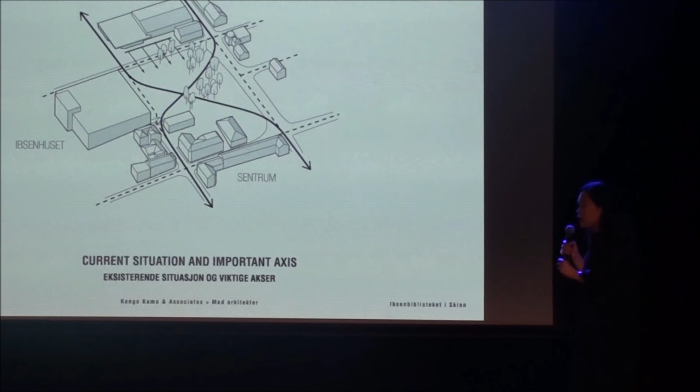So one thing we focused on is the flow of people. The current site has an amazing park, and of course the Ibsen house works very well with the park, and it's a destination at the same time. It suggests this spontaneous flow, and we decided to generate the form of architecture and planning that takes in the flow, so it becomes part of everyday life and daily activities as people use the library. So that's the current flow that we consider quite beautiful and quite interesting.

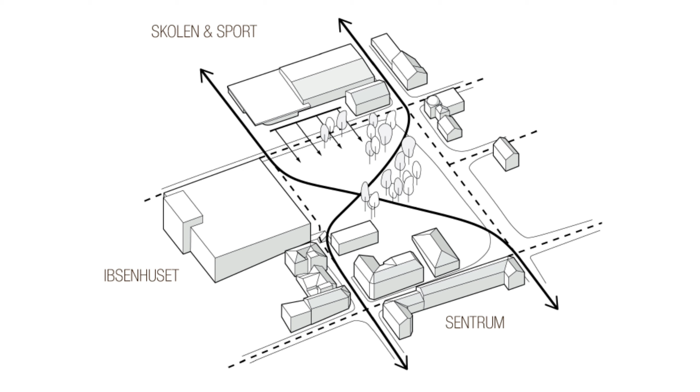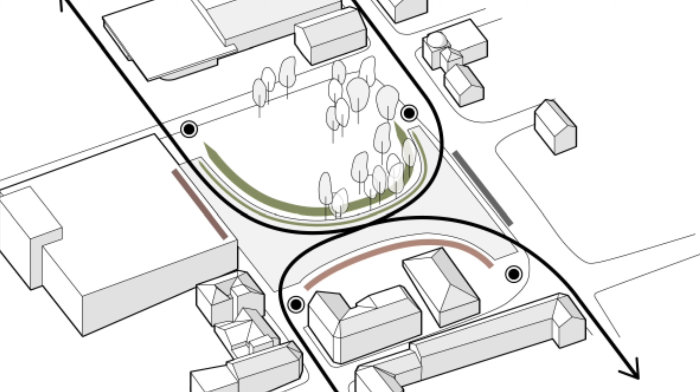But how do we accentuate this flow? By taking the flow into the library. So we tried to imagine two faces of the project. One is, of course, to fully embrace these beautiful trees in the park and the relationship to the Ibsen house. And the other is the side that faces the city, so it announces itself as the new cultural core.

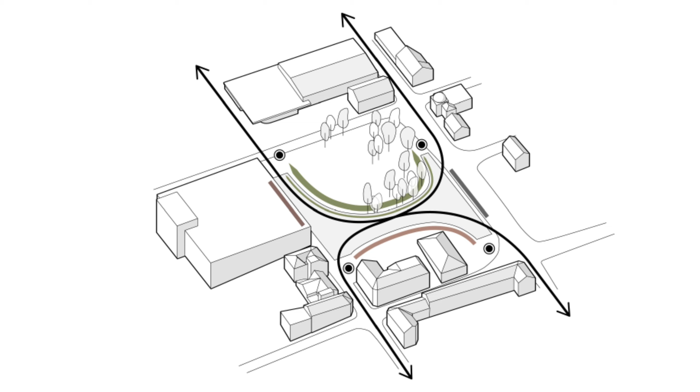Another aspect is that we need to fully integrate this house to the new library. It's a new couple that works hand in hand. These are inseparable elements: one is the library to interpret the writings, gain knowledge, and open for the public, but the house itself has that nature by showing it in the theater, the stage. It's quite natural for us that full integration and free flow in and out of the library and the house was a natural part of the planning.

So the form of the architecture is generated naturally by tracing the flow that we wanted to achieve, and the face that we wanted to show to the garden, the park, and the city side.

The second operation that we attempted is to engage the one side of the building, the architecture that is embracing the park, to be very, very low. So we have these low engagements, very human scale, very much to the scale that is inviting and works very well with the park. And second is to peel up the other side of the roof, so that it announces itself and opens itself, exposing the activity inside to the side of the city.

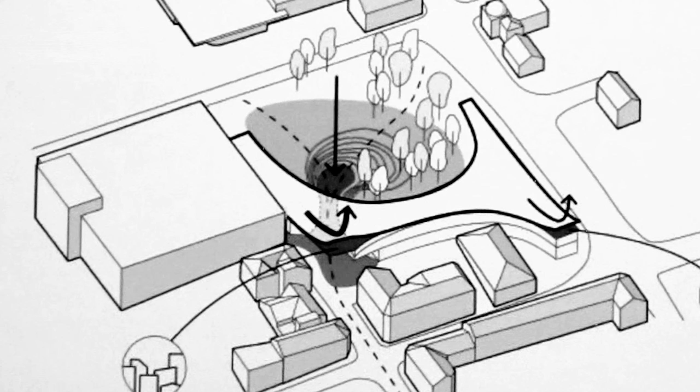One thing that we really carefully planned is the multi-axis, to have as many axis points as possible to trace and take in the flow of people in daily life and special occasions. That was something that made us generate this particular form. So as one might see, there are four sides that you can approach and enter into the new library in a very spontaneous, very natural flow.

So as it was very much introduced at the earlier evaluation by the jury member, one thing we had was this sort of breakthrough of how to connect the park to the city side.

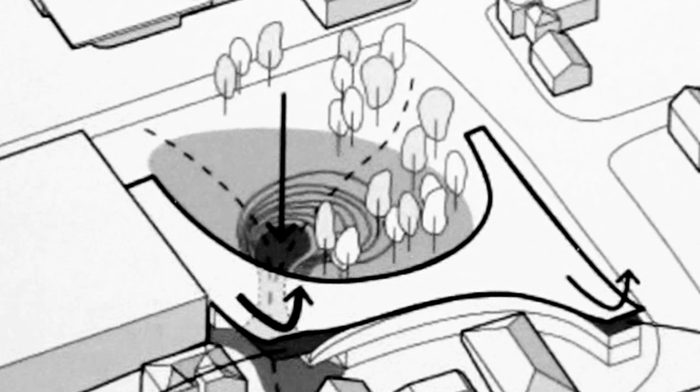It's by excavating or gently lowering down the soil, the earth level to the city side. So naturally, once you walk through this path, you'll be drawn into this stepped landscape that connects and opens to the park. At the moment, you would take a small staircase to reach the park, just to walk through. But by lowering down the large portion of the park to the level of the streets, it becomes a natural way to approach the new park.

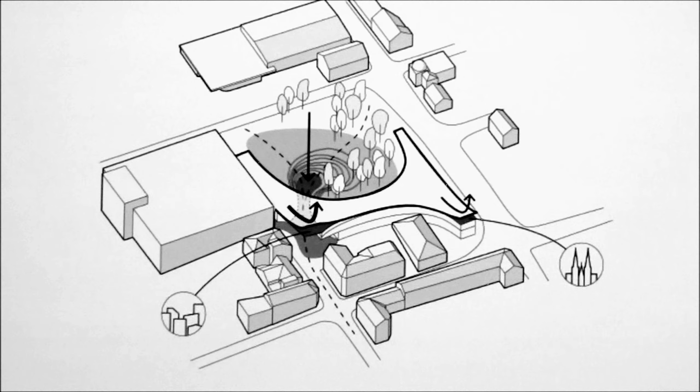So the volume of the library is designed in a lift elevation, so the walk-through without going into the library is still possible. There are many ways to experience the new library and the close connections to the Ibsen house.

This image illustrates the view from the park side and this tunnel that takes you straight to the city side, and it becomes a new face to the city side.

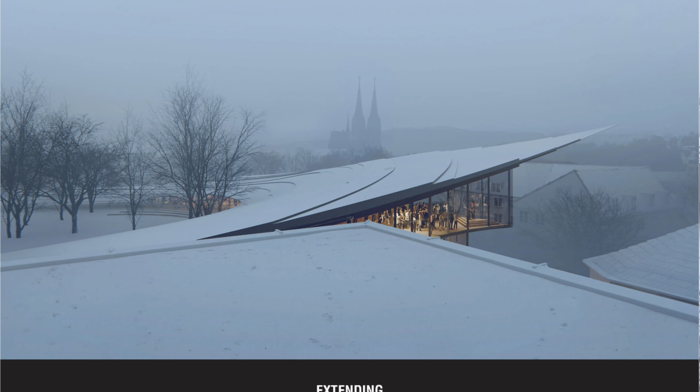This effect illustrates that the architecture starts very low and then escalates itself. The roof becomes part of the landscape too, working very well with the landscaping gesture to create this terracing, stepping down configuration. So the new library volume is bridging over this tunnel and connections to the city side.

The idea is also to create this level of transparency and openness, so one would feel very much into the scene of the natural setting among the trees, just reading quietly. So the full transparency allows the space to be very much a part of the park, and the park being part of the library.

So the way that we imagine the full integration is that not only at the lower levels, but at each level there's a connection to the new library.

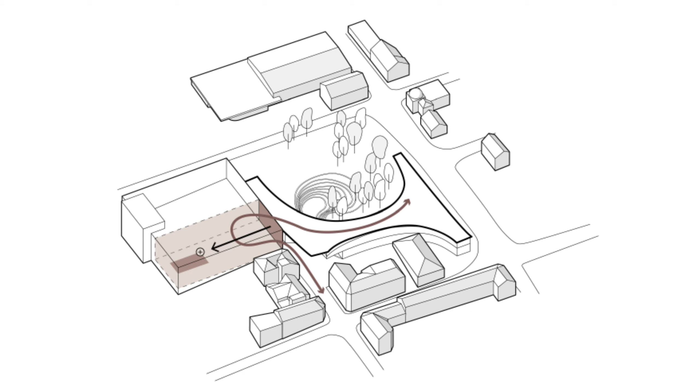So this is just a quick illustration that shows the potential way of using the outdoor, new outdoor design.

One is this stepping down, this lowering of the landscape. This becomes an amphitheater, which would be a beautiful opportunity in a good season or even in the snowy season, where one would imagine the performance taking place at the very lower point of this landscape, with our spectators, the audience, sitting on an outdoor amphitheater.

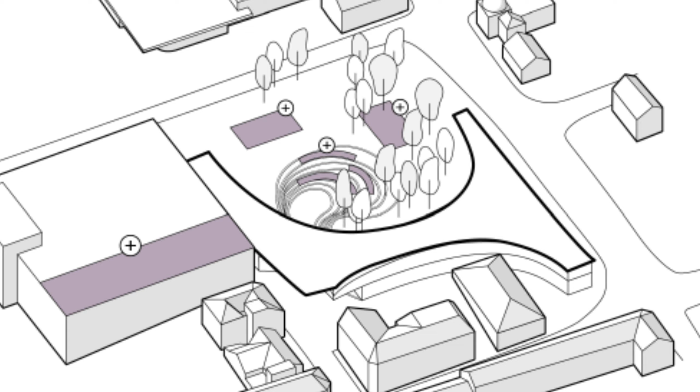And this is also visible, the scene is going to be quite visible and engaging once you approach from the city side. And since this library is completely open to the outdoor, the visibility from the interior of the library would be available to this performance scene.

And of course, the scattering of the pavilions would be potentially a good venue for future events as well. And the roof of this building, we climb up there, and the view from there is just really amazing.

So I'll switch to Mark to take you through the plans.

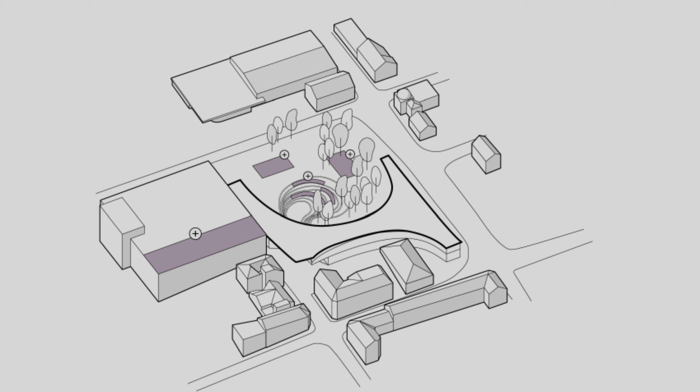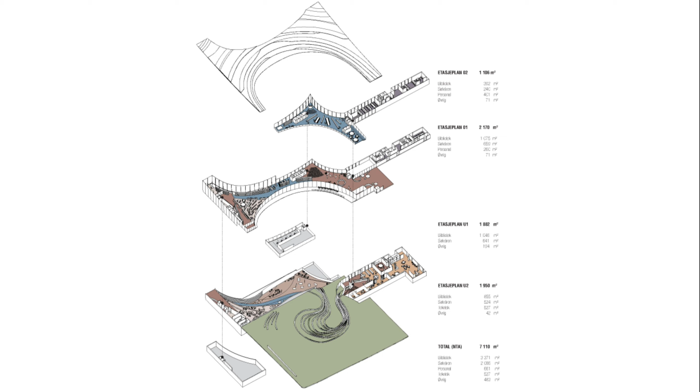Yeah, so I will walk you through how the program and the shifting paradigm of libraries today, the library of the future, inform the plan layout, and of course how Ibsen's writings influence the plan layout.

What we have here is, so this is the ground floor. I'll start with the ground floor plane here, where we can see how the ground floor plane is composed of this open space, open plan layout that really allows for all this flexibility needed for this type of program required by libraries today.

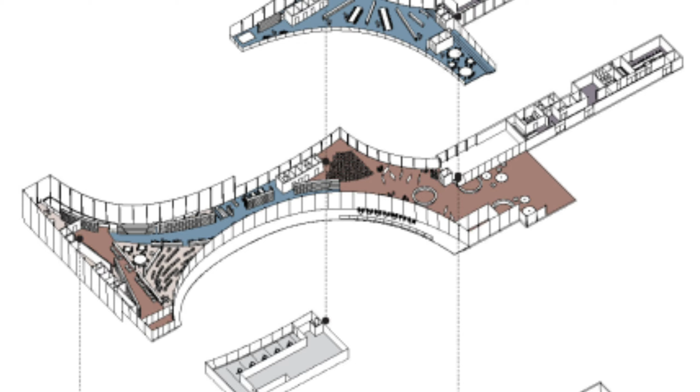So the flexibility will allow for narrow spaces, larger spaces, compression, decompression. What we have is the main entrance here, connected with the Ibsen house on this side.

We have another entrance from this side, and we see it in blue, the silver vein, how it's running throughout the whole building. Going up to the mezzanine, again we see how we have always this compression, decompression of the spaces, the administration in the existing building in the back.

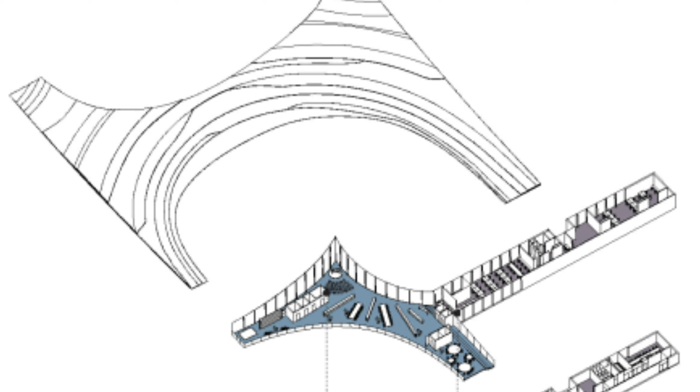And then if you go down to the basement, the basement is divided into two different levels. Basement one allows entrance from here for the kids zone, and another entrance from here for the youth. Likewise, we have another entrance from the valley, from the tunnel that brings the landscape down and reconnects to the city.

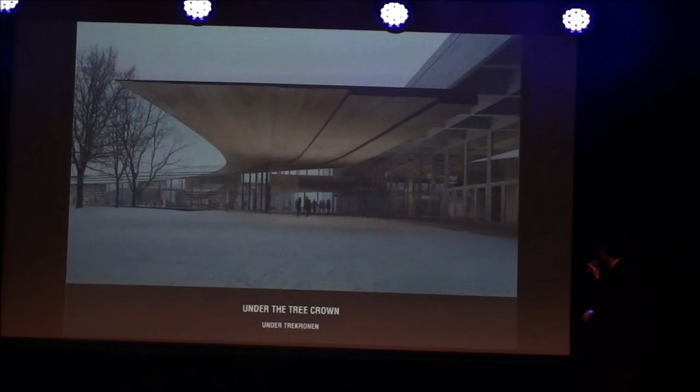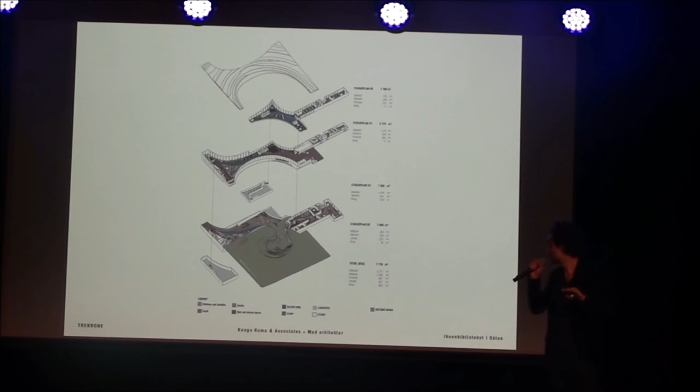Going down to the basement, what we have here in basement two is a totally different way of experiencing the space. We have a more cave-like space, slowly and gradually going down, then linking to the other side of basement one here.

I will go through one by one now with the plans. So this site plan shows how the garden is also reflected in the roofscape, where everything works in a homogeneous way. We can see how the shape of the building really embraces the park on one side.

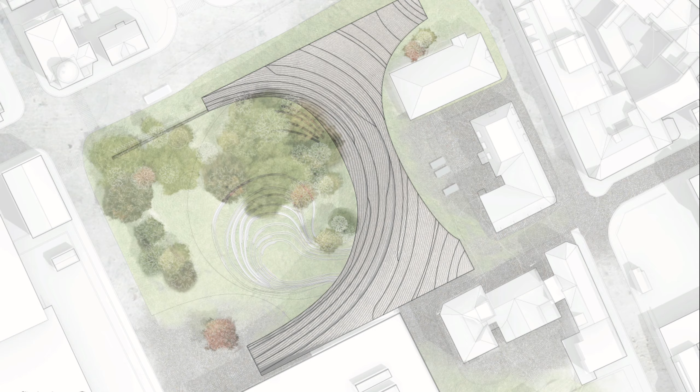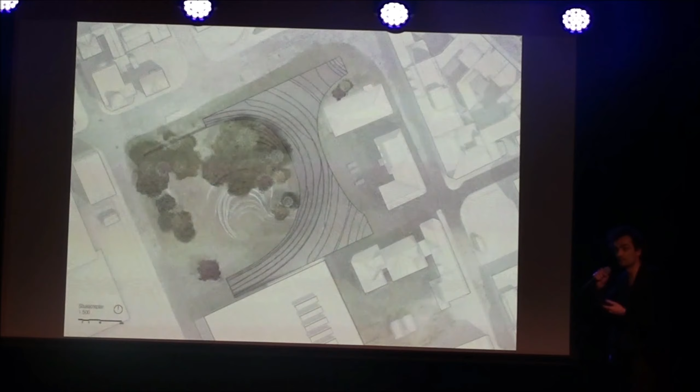So the ground floor here, what you can see is how we have this diverse range of spaces, going from larger gathering spaces to more cozy and loungy spaces, always overlooking the park on one side, overlooking the city on another, spaces for performances, and also this semi-outdoor space here.

That opens up on a terrace overlooking the park. On the main entrance here we have the citizens corner, which gives you flexibility for all the users and a continuous flow.

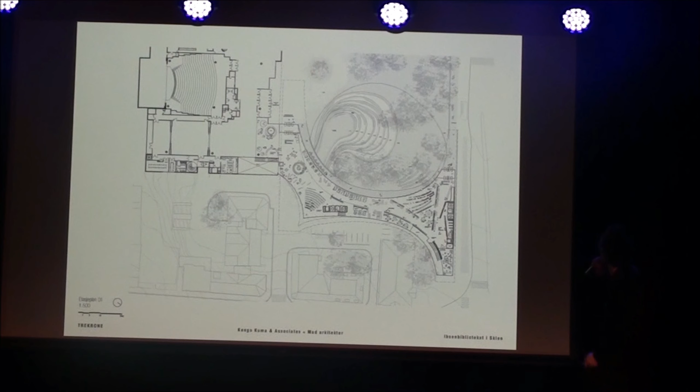Another entrance is from the north side here that will also link to the bus stop on the other side.

This shows the mezzanine here. So the mezzanine is connected at the same time with the administration zone here, that's part of the Ibsenhuset. It's overlooking the ground floor space all around here.

So it's always this compression, decompression that works not only horizontally, but also vertically, which is really directly related to Ibsen's writings.

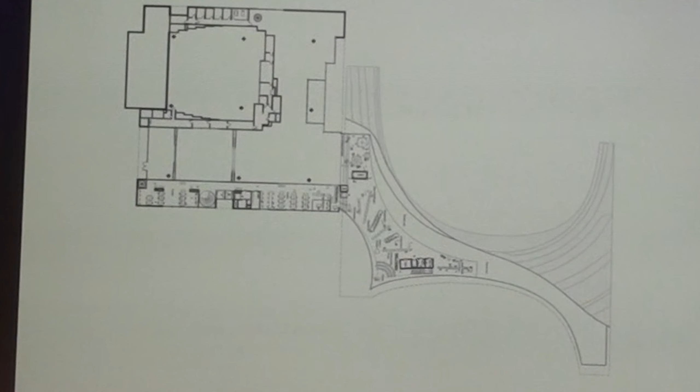Again, this warmth, this compression, low space, decompression, higher spaces, and this is the mezzanine here on this side. Going down to basement 1.

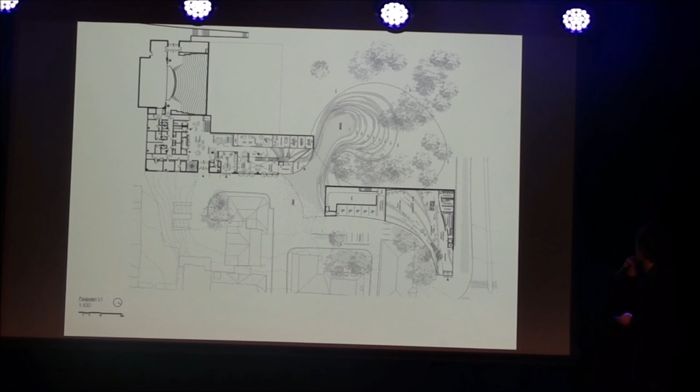We can clearly see how it's all interconnected. We see how the bleachers going down from the landscape goes in through this tunnel-like, exposing an entrance here, another entrance here where we have the urban office. So there's really a diverse ways of entering the buildings, diverse ways of getting lost in the building, but at the same time always knowing how to end up. So this really creates a space for encounters, the unexpected.

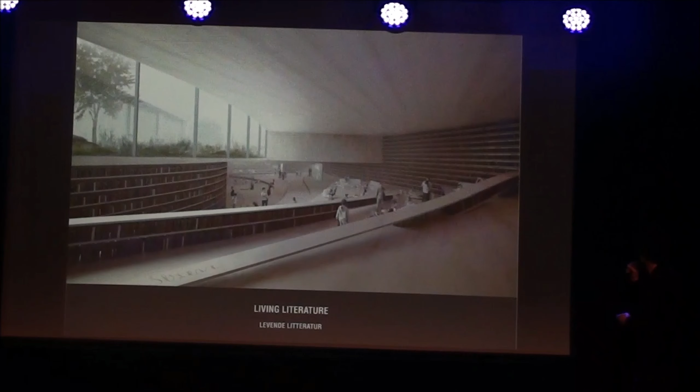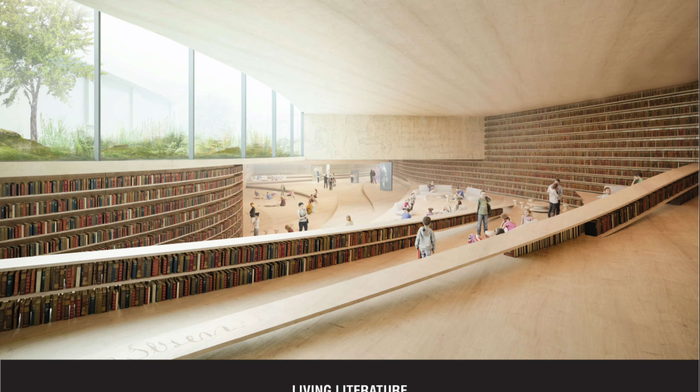So it's really a variety of experiences, very diverse, with the walls of books and the natural light always coming in. So this basement 1 has multiple access points coming down from here, cascading down and going back up to join the basement 1 level and the ski street on this side.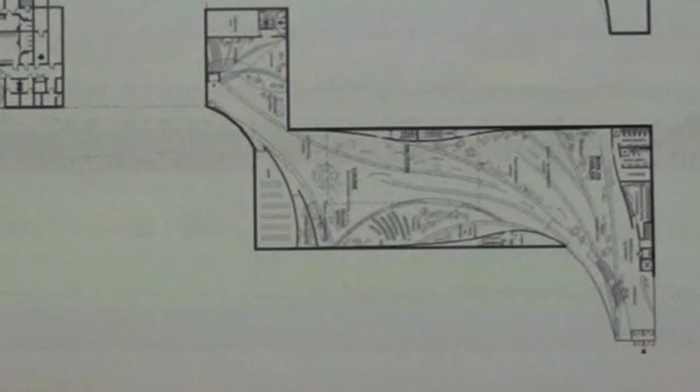What you can see here is the diversity of use of spaces, and we always have these performance spaces that people can gather in and experience all kinds of performances on each floor level. So this gives really a flexibility for each floor's users.

Again, the view from the other side. This one is looking, going back up.

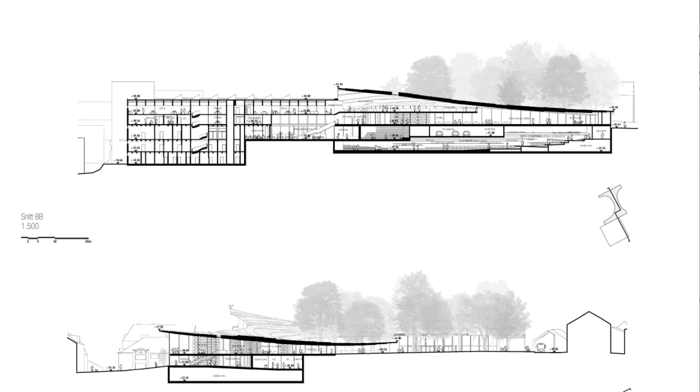On these sections, what you can see on this side here is really the connection between the existing Ibsenhuset and the new house. On this section here, you can clearly see how slowly and gradually the roof goes up, where you have a more human scale on one side of the park, and then it goes gradually up towards the cityscape, giving it this prominent feel.

One thing I wanted to mention is that the idea of the silver vein was not only to derive or generate the planning or the form of the project, but also the program given to us, to exhibit the items, writings, or ideas of Ibsen. It exists, and we implemented it in a way that the bookshelves could be exhibiting items, where the front and back of the bookshelves could have an opportunity for exhibitions.

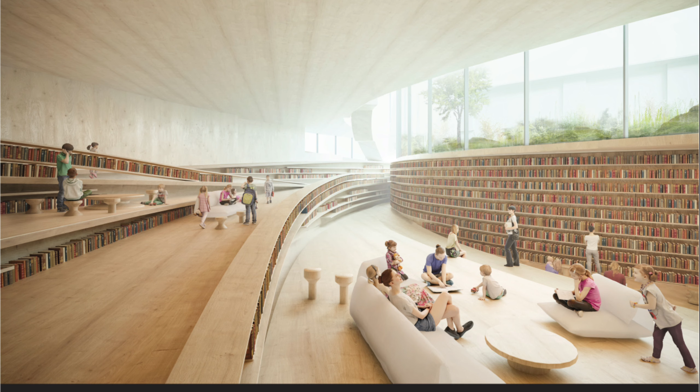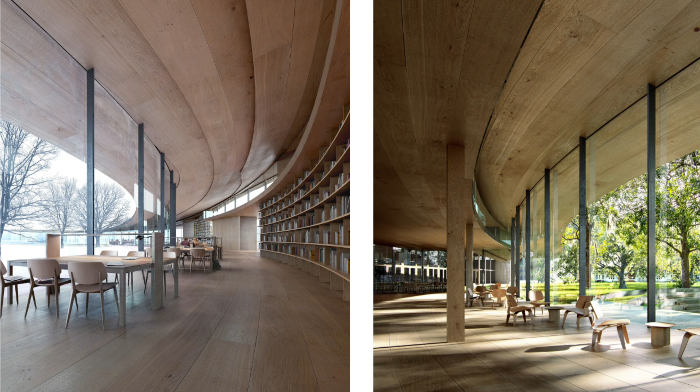Both the basement layout and the upper level of the ground floor have focused on creating an open plan. So there are no solid partitions in between, but you can see the landscape of the reading areas, as well as spontaneous lounge space, for being alone, being together, being with family. So it offers an excellent amount of flexibility in all the spaces we are composing.

So yes, the silver vein exists everywhere. It's not that we identify it in specific locations, but the idea of the presence of Ibsen is a continuous vein. Just one thing I wanted to add.